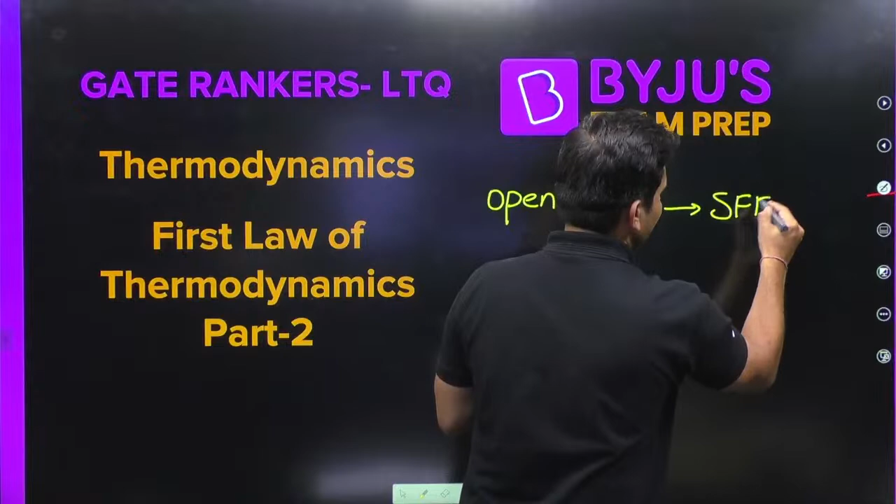Yesterday we were discussing first law of thermodynamics, but our focus was on closed systems. We have done one question for open system. Today our focus is on open system, and in open system we talk about the steady flow energy equation and the unsteady flow energy equation. This is our focus for today. Okay, so let's start.

Let's very quickly move to the question that I gave you yesterday. Sachin, I think you were there, and if people here were there yesterday, could you please tell me, did you solve it? What was the answer? Did anyone try this question so that we can move ahead? Because today we have to solve many questions for open system. Did anyone try this? Very quickly, can you please tell me what is the answer for this?

Which statements are true? A is not correct. Yes, very nice, Bhavya. Is B, C and D correct or not? Okay, you did not solve it, or you were not able to solve it. Sachin, did you try it? Rest all are correct. B, C, D are correct. B, C, D, they are all correct.

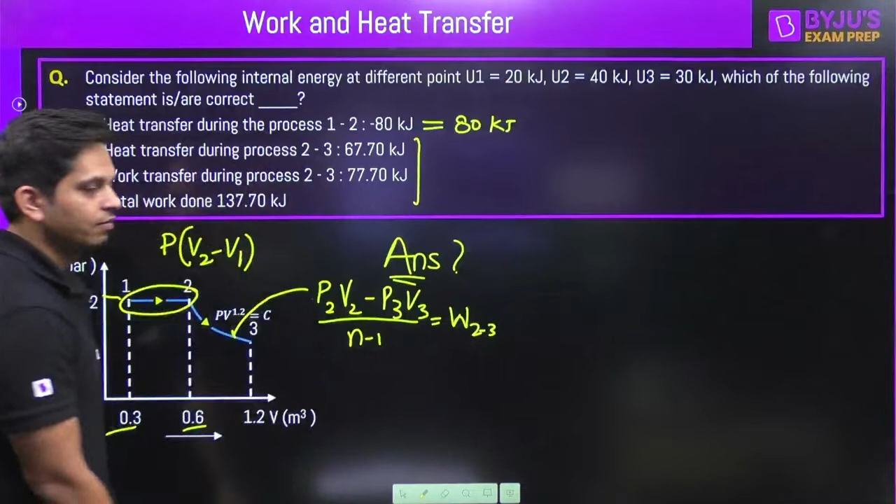Okay, Sachin, we will move ahead because I have to solve some open system questions which are fairly long, so we have to focus on that as well. But that is a very easy question. Okay, so we are moving ahead. Okay, this is the first question.

A gas flows steadily through a rotary compressor, so they are saying it is a steady flow. The gas enters the compressor at a temperature of 16 degrees Celsius. So what do we have? We have a compressor, entering here, and coming out here. So a gas is entering into the compressor at temperature 16 degrees Celsius.

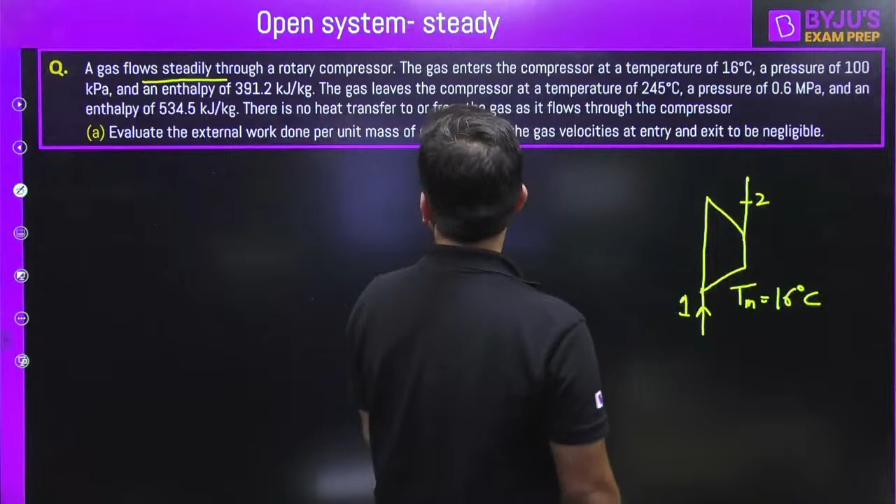Temperature T in is equals to 16 degrees Celsius and pressure is 100 kilopascal. Okay, and enthalpy is also given at the inlet, enthalpy is 391.2 kilojoule per kg.

Now the gas leaves the compressor at a temperature of, so it is leaving, T out is equals to 245 degrees Celsius. Pressure is 0.6 megapascal, okay, it is megapascal not kilopascal, you have to change it into kilopascal. And enthalpy is also given, enthalpy is 534.5 kilojoule per kg.

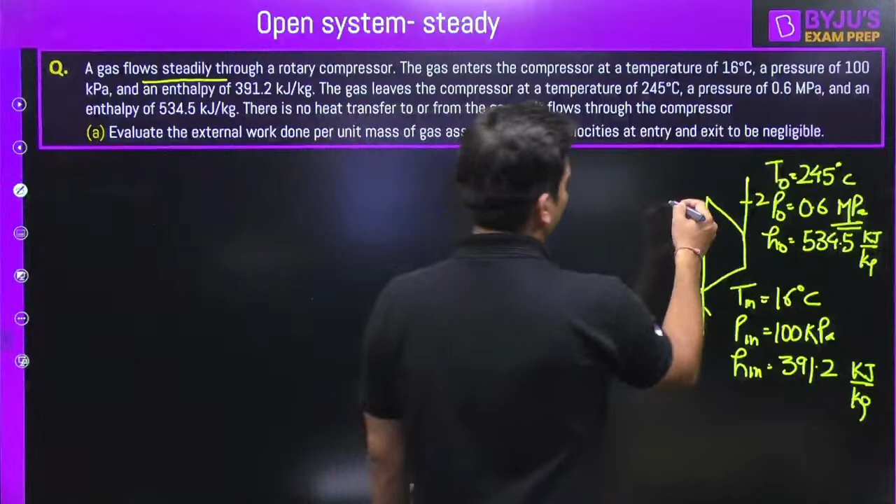Kilojoule per kg. There is no heat transfer, neither it is coming in nor going out. So heat transfer Q net is equals to 0. Now evaluate the external work done per unit mass, so mass is 1 kg, assuming the gas velocities at entry and exit to be negligible. That is part A.

Okay, so what do we know about this? It is a steady flow system. What do we know about steady flow systems?

If I apply energy conservation, the first law of thermodynamics, in this system, can I write: energy in equals energy out plus energy of the system, if there is any change in the system.

Now it is a steady flow system. What does it mean by steady flow? Whatever mass is coming in, the same mass is going out. No mass or energy accumulation inside the system. There is neither the mass increasing nor decreasing, nor the energy of the system increasing. So there is no mass accumulation inside the system.

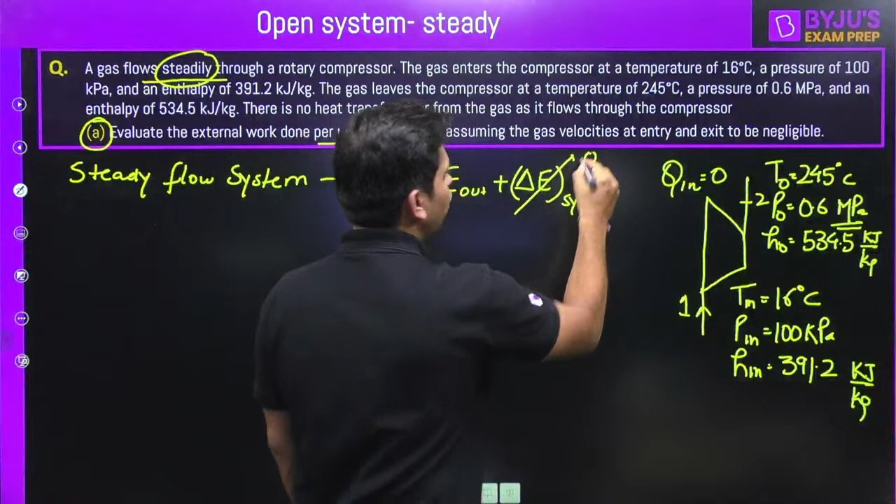Inside the system there is no mass accumulation and no energy accumulation, so this becomes 0 only for steady state. In unsteady state this is not equal to 0, we will see what it means. In unsteady state the energy of the system changes - this is your system. So for steady state, steady flow, it is 0; for unsteady, it is not 0. So what is energy in, what is energy out? We all know what is the steady flow energy equation.

M in, H in, plus V in square by 2, plus GZ in - what is this? This is the energy that this mass has. Whatever mass is entering into the system, this much energy it has. This is the energy going inside with this mass, whatever mass is going in. It is because of its temperature, its velocity, its potential difference.

Also, if any heat we are giving to the system, we are assuming that we are giving the heat to the system as of now.

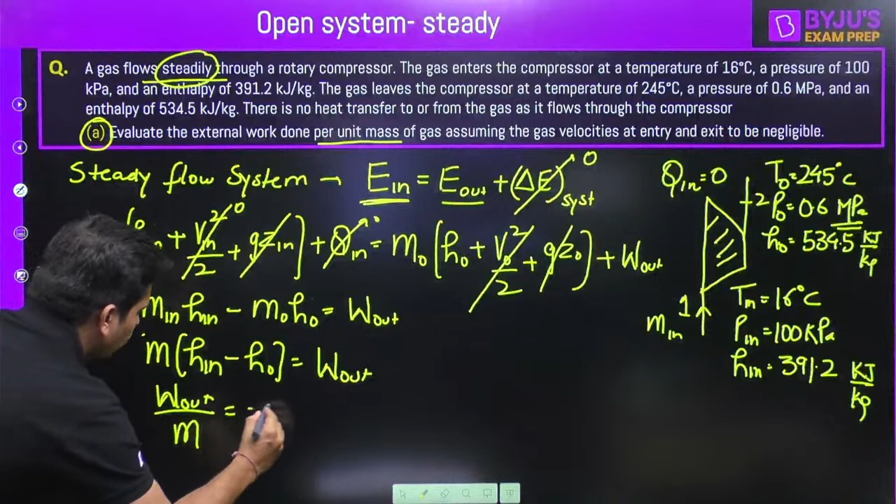Now it is a steady flow system, so what do I know? I know that mass in is equal to mass out, since it's a steady flow system. I can take mass common: H in minus H out is equal to work output, and now I can say work output by mass is equal to H in minus H out.

Now what is this? This is work per unit mass, external work done per unit mass, so I can show this by small w. Work output is equal to H in minus H out. H in and H out is given to me - this is H in, this is H out. When you put this, you will get minus 143.3. Kilojoule per kg.

Why is it negative, Sachin? Yes, very nice. Always put the units, please.

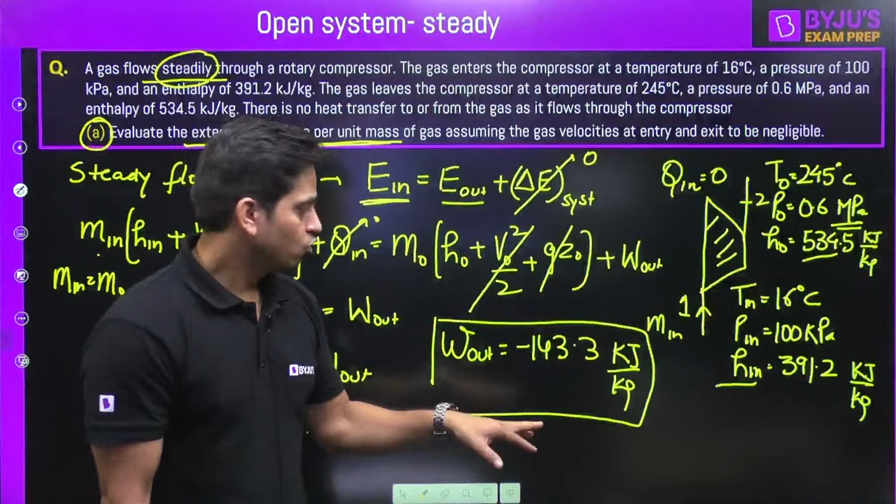So why is it negative? Because in the beginning I assumed that my system is giving me work. I have taken the notations like this, so this is not work output. Work output is negative, it means it is work input. This is when I am assuming gas velocities at entry and exit are negligible.

Very quickly tell me, if I also assume entry and exit velocities, what will be the answer? We have to do some work on the device. Yes, that is why it is negative, because we assumed that my system is giving me work. If it was positive, that means it is giving me work, but it came negative, which means I am giving that work to the system.

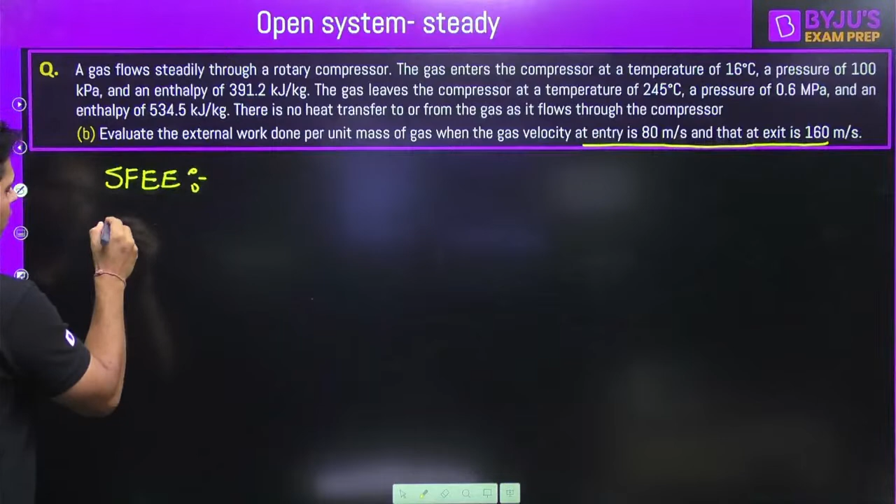Now very quickly write the steady flow energy equation. H in plus V in square by 2 plus GZ in plus Q in by mass is equals to H out plus V out square by 2 plus GZ out plus W out by mass. I have divided everything by mass.

161, I don't think it is correct. Can you please check it one more time, Bhavya? I don't think 161 is correct, just check one more time. So this is 0, we know, this we are assuming negligible.

So work output, let me write it by small w, is equals to Hi minus H naught plus Vi square minus V naught square by 2.

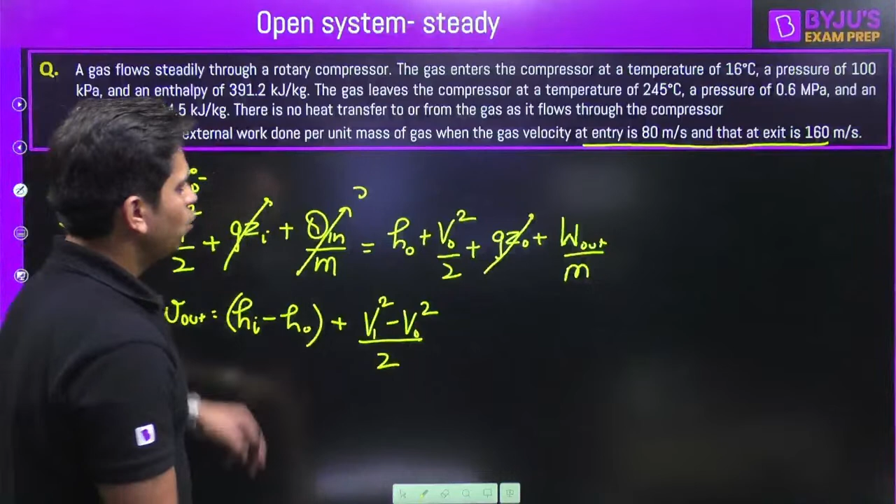Now there is something that you need to consider here. This equation is derived in a way that it is in joules. H is in joules, H is in joules per kg. Velocity is in meter per second.

And GZ is what? Meter per second square and meter, so this is meter square second square. So basically it is in terms of joule, not in kilojoule.

Whenever you are putting, now you have to be very cautious when using this equation. When you are putting H in kilojoule, which is given to us, you have to multiply this by 1000. This 2, you have to multiply it by 1000. Also, this you have to divide by 1000.

Then these, because what do we know? That meter square second square is equals to joule per kg. Okay, joule per kg, you can try to derive it. You can try to derive this, it can be proved.

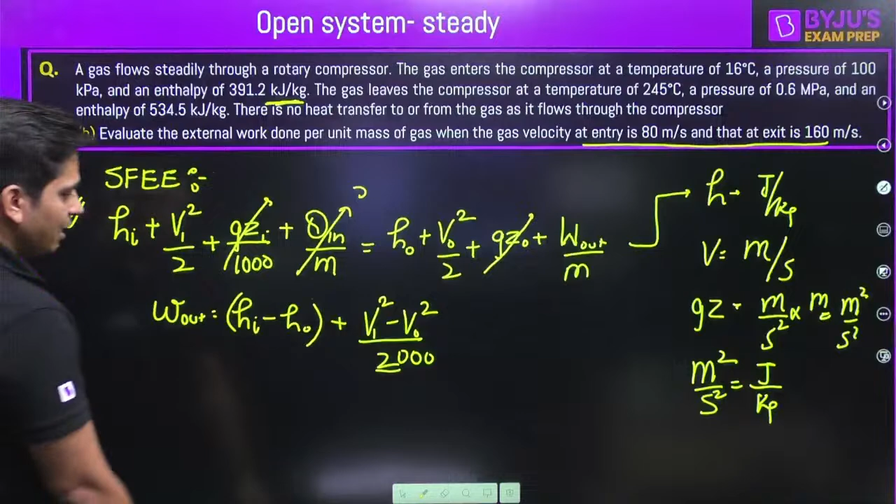So now I think you should get the answer. How much is it? V1 is 80, V2 is 160. 152.9, absolutely correct. Sachin and Pawan, are you able to solve this? Did you solve it? I think you made some mistake earlier, but are you able to solve it now? Pawan, yes, minus 152.9 kilojoule per kg, absolutely correct.

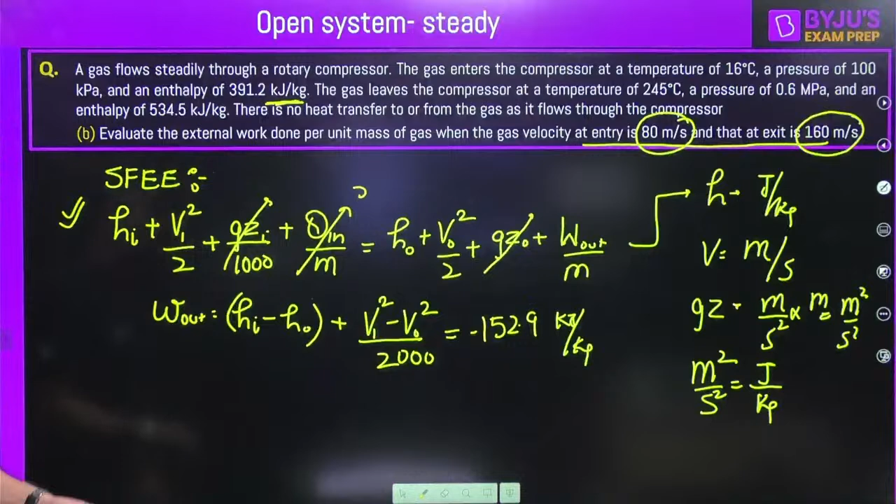Kilojoule per kg, okay, so we can move ahead with the next question. This is a good question. I have shortened, I have reduced the question for you. It has 4 parts, but we are considering only 2 because that is relevant for our open system. Now what is it saying?

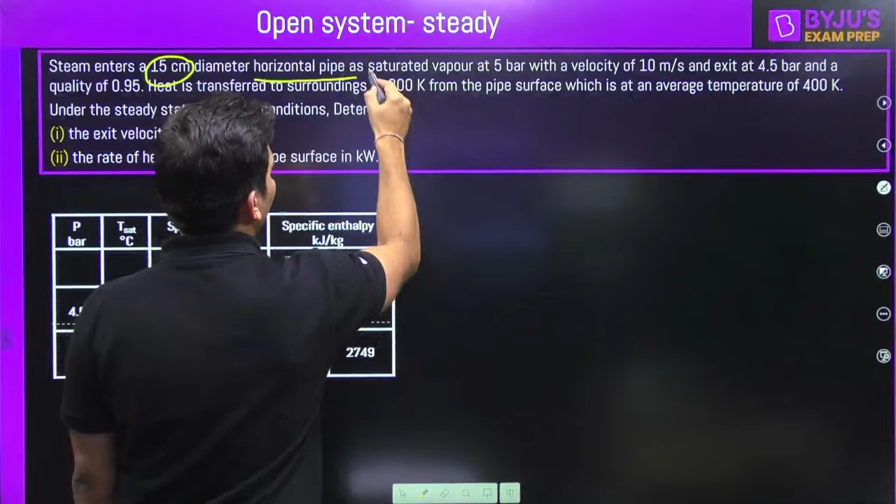It is saying steam is entering into a 15 centimeter diameter horizontal pipe. Please consider each and every point, each and every point is important. This is the diameter of the pipe. We have a horizontal pipe and saturated vapor. Saturated vapor means, what is the dryness fraction? X is equals to 1.

It is entering at 5 bar with a velocity of 10 meter per second, and it is exiting at 4.5 bar. So pressure is reduced, and the exit quality is 0.95. So what does it mean that if I say the quality is 0.95?

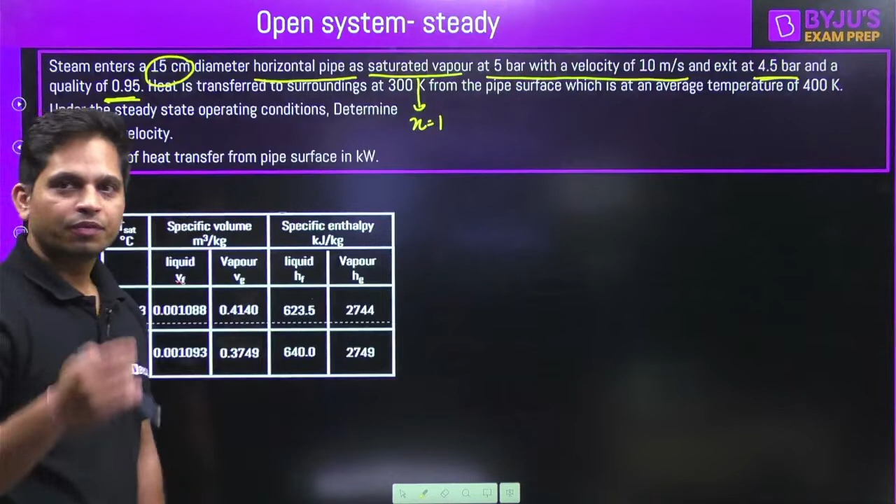If I am saying quality is 0.95, what does it mean? It means that it is a mixture of vapor and liquid, and 95% is vapor. Now heat is transferred to the surrounding at 300 Kelvin from the pipe surface, which is at the average temperature of 400 Kelvin.

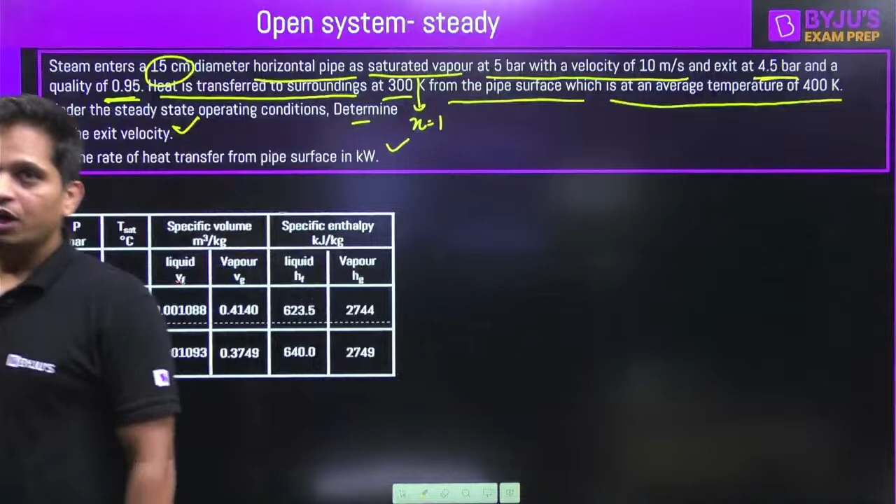So the pipe surface is at 400 Kelvin, surrounding is at 300 Kelvin. Under the steady state operating conditions, we have to determine exit velocity and the rate of heat transfer from the pipe surface. Now, because it is a mixture of vapor and liquid, this steam table is given. We are going to use that to find the exit velocity and rate of heat transfer.

Okay, so this is the question. Let us draw the diagram of it. We have a horizontal pipe.

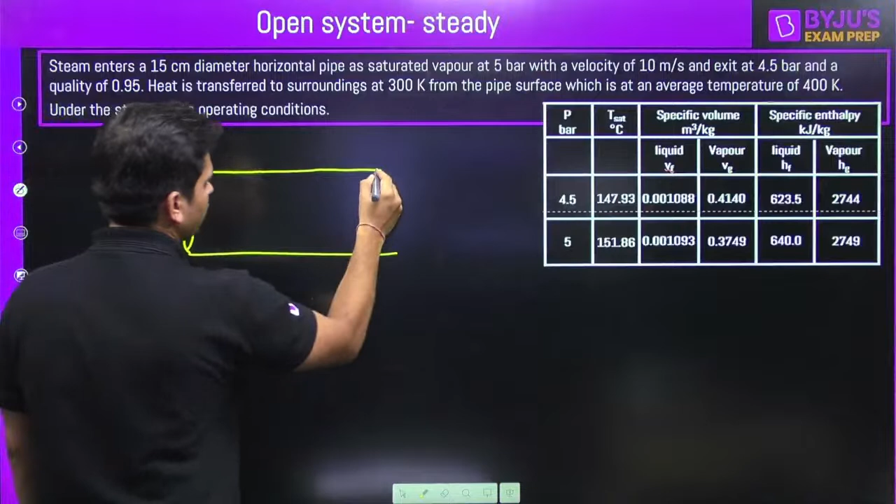We have a horizontal pipe of diameter 0.15 meter. Can you tell me what is the area? Pi by 4, 0.15 square. Please calculate the area. Okay, this is the area of this pipe.

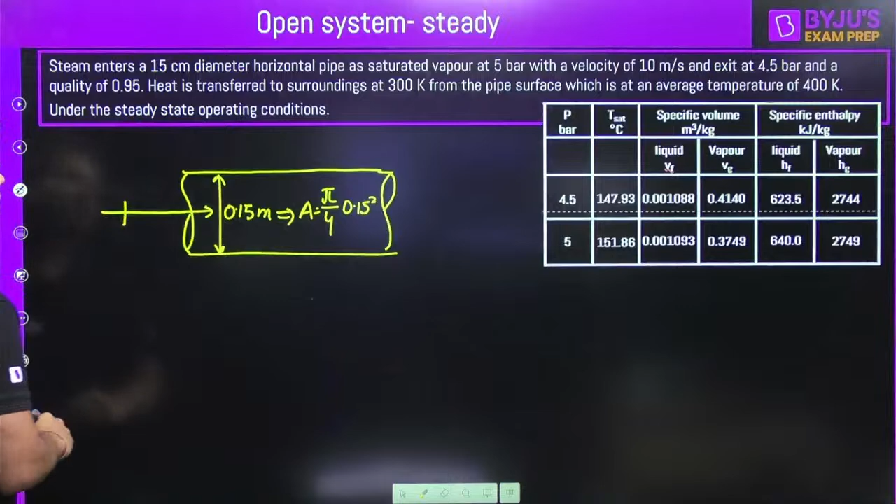Now steam is entering at 5 bar. So P1 is 5 bar and velocity 1 is how much? 10 meter per second.

Okay, let me check. No, that is not correct. What is that? Meter square. What is meter square? What? Okay, I'm sorry. Area is okay. That is correct, I think. Let me check the answers. 0.0177. Yes, correct.

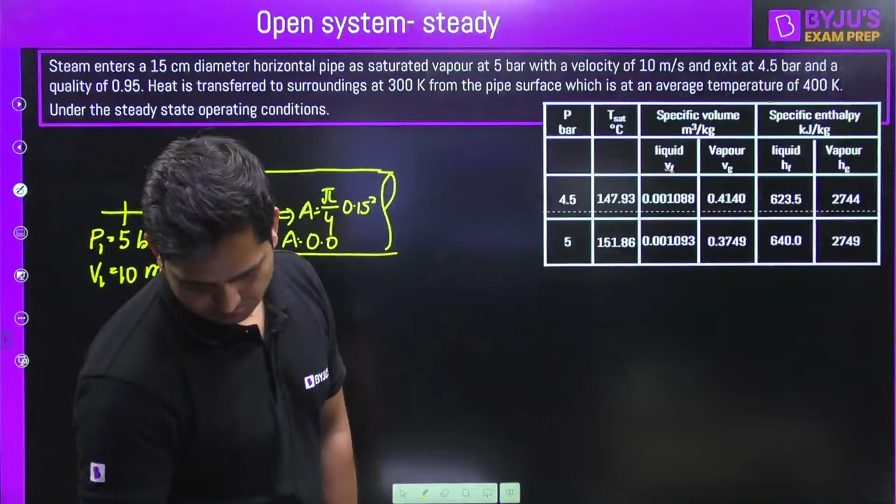Area is equals to 0.01... 0.0177 meter square. Okay. Now the steam is coming out.

Here the dryness fraction is equals to 1. It is pure steam. Here the dryness fraction is 0.95, that means it is a mixture of steam and liquid. And pressure given at this point is 4.5 bar.

Now I need to find out V2 and... I'm sorry, I need to find out heat transfer. So they are saying some heat transfer is also happening. Q out is there, Q out is there. So two things I need to find out.

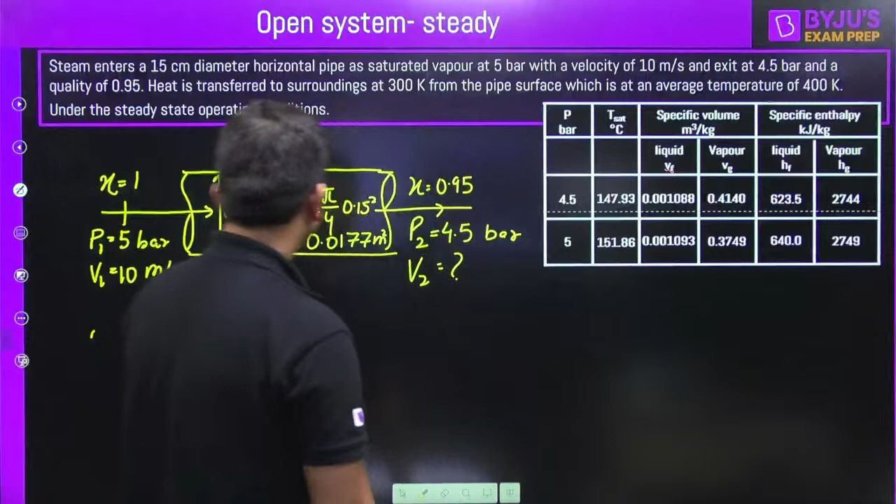Okay, so what do I know about steady flow? I can use the steady flow equation, right? So let me write the steady flow equation, the steady flow energy equation.

What is it? M in, H1 plus V1 square by 2 — always if you are putting H in kilojoule, you put here 2000. But I always define it according to joules, so this is a general equation, plus GZ1

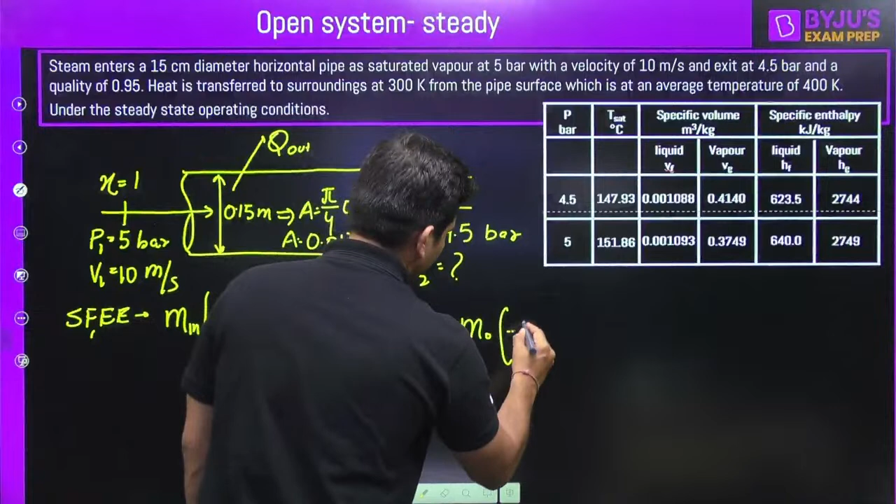plus Q in is equals to M out, H2 plus V2 square by 2 plus GZ2 plus work output. We all know this equation, there should be no doubt about it.

So we know it is a horizontal pipe, so I can neglect this. Also, steam is just flowing, there is no work output. It is not a work producing or work absorbing device, it is just a pipe.

They are saying some heat transfer is happening, which we need to find out. So I need to find out this, I need to find out V2 as well. So two unknowns are there in this equation.

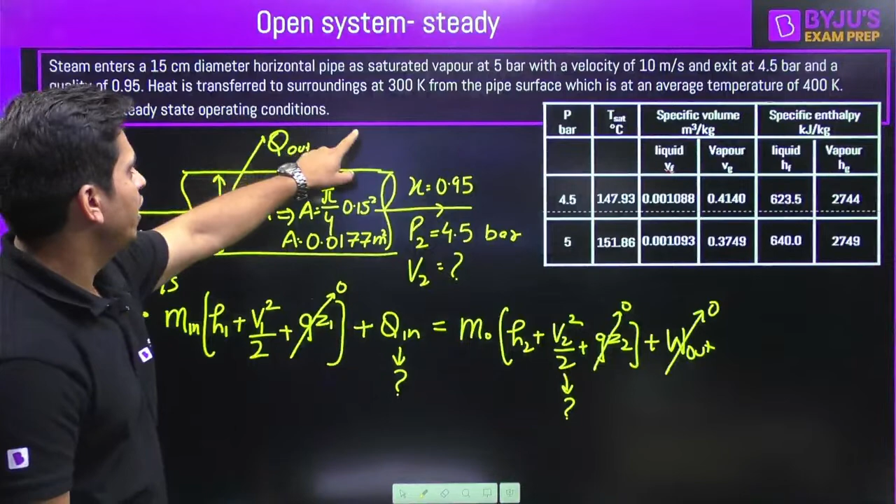Q, when you look, that is what? It is saying heat is transferred to surrounding at 300 Kelvin. So I know that there is some Q out. Now if it is Q out, I'll get negative, it's not an issue.

How to follow your lectures in order? I was not getting your previous classes.

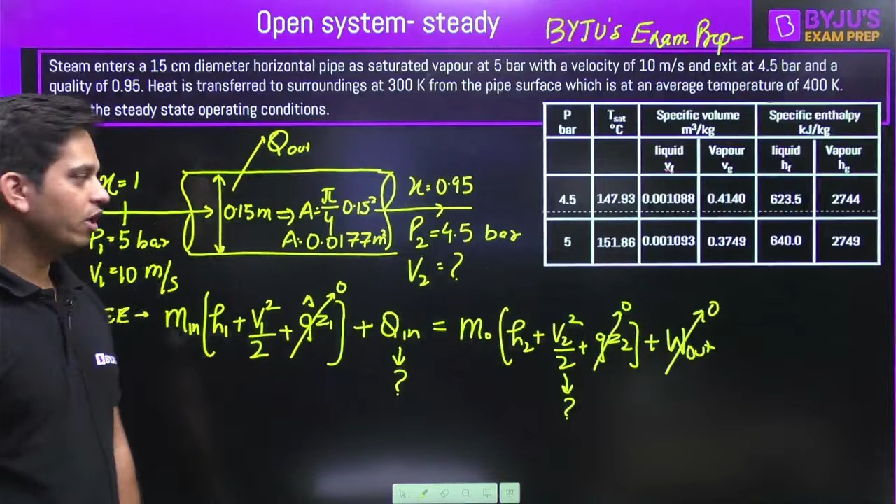So about work output, you should know that if it is a turbine, if it is a compressor, then you cannot neglect that. If it is a heat exchanger, a nozzle, a diffuser, a pipe, where only flow is happening, then you can neglect work output.

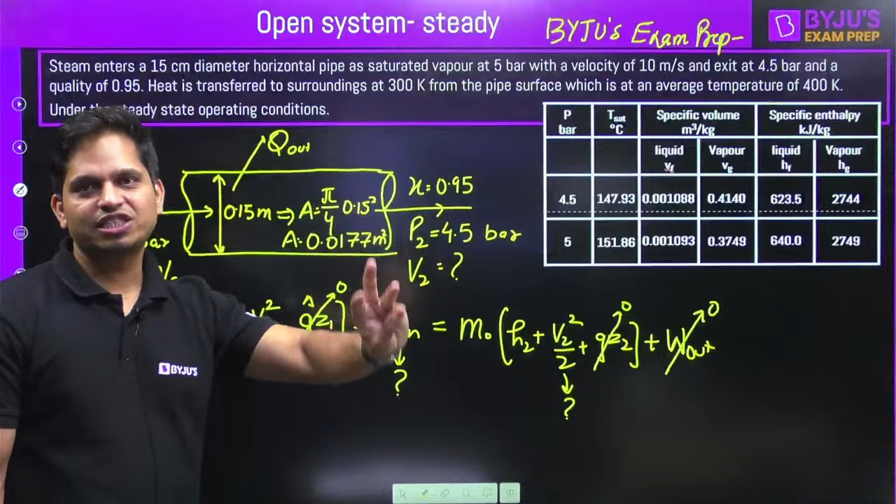Okay, those are not work producing devices. Only turbines and compressors or pumps handle liquid, so that doesn't come into thermodynamics much. Thermodynamics, 99% we deal with gases. We don't talk about pumps in thermodynamics much, but sometimes a question comes. In compressors and turbines, work cannot be neglected. In nozzles, diffusers, heat exchangers, pipes, work is neglected. Very quickly let's move on, we have less time and have to solve a lot of questions.

Now is there any other unknown in this, or can we find things out? How can you find out M in? M dot in is equals to rho 1 A1 V1, velocity, density, area into velocity.

Okay, so can I write A1 V1 upon specific volume 1? What is specific volume 1? Specific volume here, where we have 5 bar and saturated steam. So, area into velocity upon specific volume. Can you tell me what is the value of specific volume 1, V1?

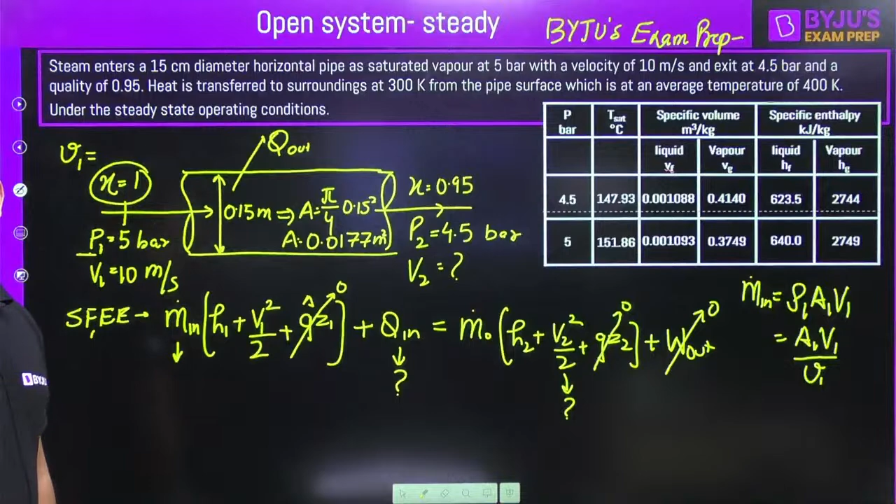Can you see this table and very quickly tell me what is this? I hope this table is clear, it's not blur. 0 point, yes, very nice. This is V1, very nice.

So you can find out M dot in, and it is a steady flow system. So M dot in is equals to M dot out as well. It is a steady flow system. Now what is happening? It is a steady flow system. Now, so I know this, I know this, I know this.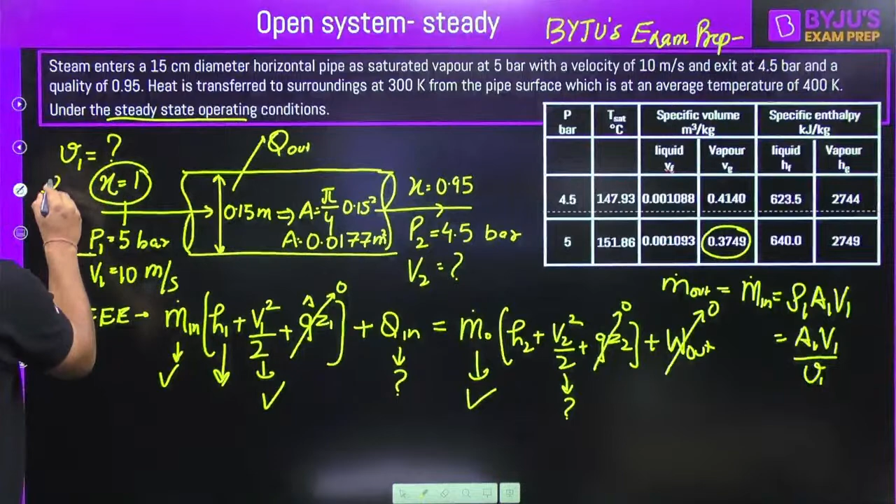V1 is known to me. H1, what is H1? Can you tell me what is H1? Can I calculate what is H1? H1 is here.

M1 is equals to, I think, 0.471. Yes, that is correct. Bhavya, M1 is 0.471, or 2, I think I got 2, but anyway, kg per second. Okay, H1, can you tell me H1? H1 is 2749, very nice. So this is also known.

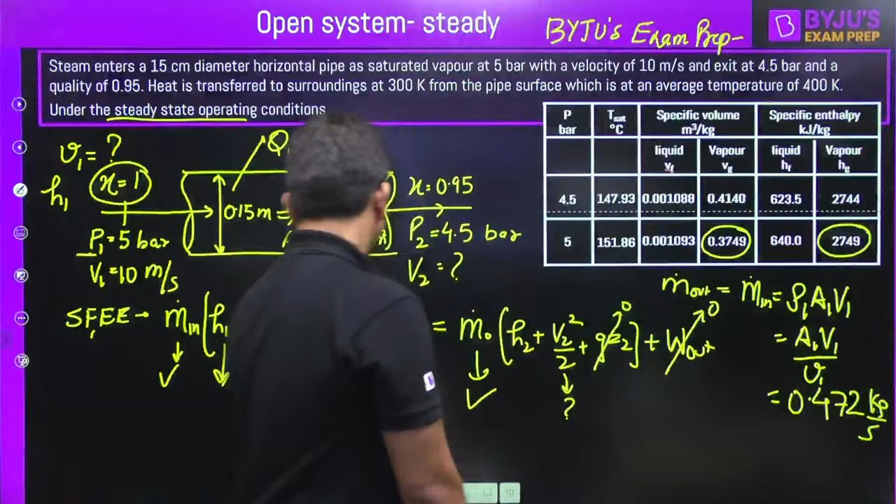How can you find out H2? Can I calculate H2? Sachin, yes, 0.472. I think I am getting the same. Okay, can you tell me what is H2? Very quickly.

H2, can you calculate? Here is it H2. H2 is this side, and I hope you all know it is HF plus X HFG. Very nice, Bhavya. So can you tell me H2 as well? Then the question is solved. Nothing is there, just the value of H2.

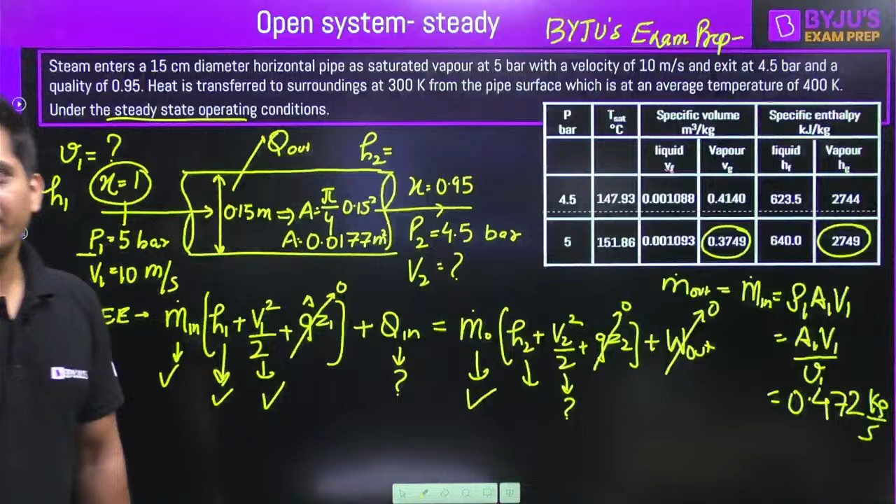Sachin, is it clear how I... so here you write HF plus X into Hg minus HF. But it is at what? Exit, so 4.5 bar. So you will see this, and this is your Hg, this is your HF, and X is equals to 0.95.

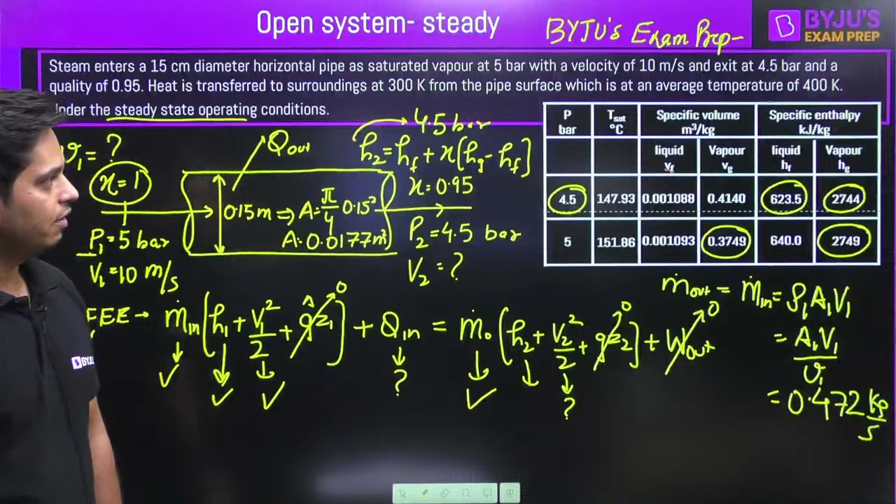So can you tell me how much is H2? H2 is... no, it is not correct. Are you not able to see the values, Bhavya? Is it blur or something? Pawan, did you ask something? Is there an issue? I can explain. 2637, yes, that is correct. H2 is 2637 kilojoule per kg.

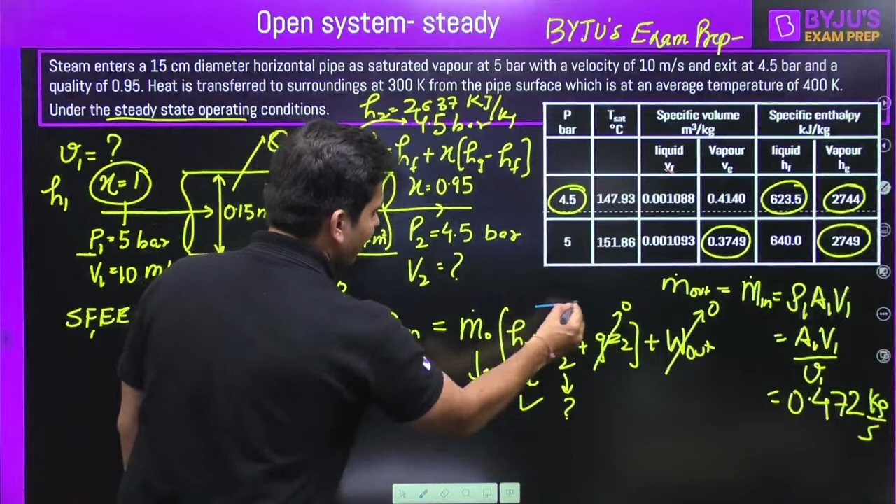Now, can someone very quickly... okay, so the conclusion of this is that I know H2 as well, but still I have this unknown, and I have this unknown, two unknowns. So I cannot use this equation. Everything else is known to me, but I have two unknowns, so I cannot use this equation. So what will I do?

I need to calculate exit velocity, and it is a steady flow system. In a steady flow system, SFEE is valid, and also continuity equation is valid. Continuity equation is valid. What is continuity equation? Mass conservation equation.

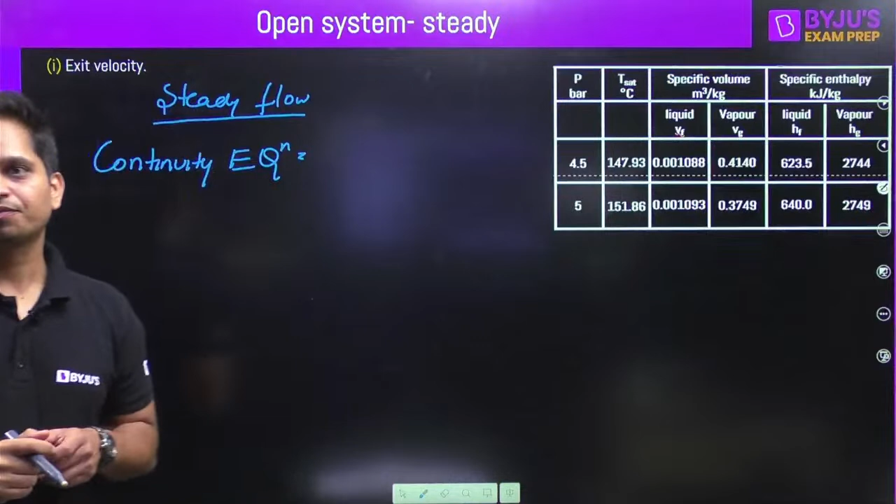Okay, so m dot in is equals to m dot out. A1 V1 upon specific volume 1 is equals to A2 V2 upon specific volume 2. Sachin, are you gone? Why are you not answering? Are you not calculating?

How much is the HF? Okay, HF is 623.5 kilojoule per kg, this is HF. Hg is 2744 kilojoule per kg. HF is 623.5. Yes, okay.

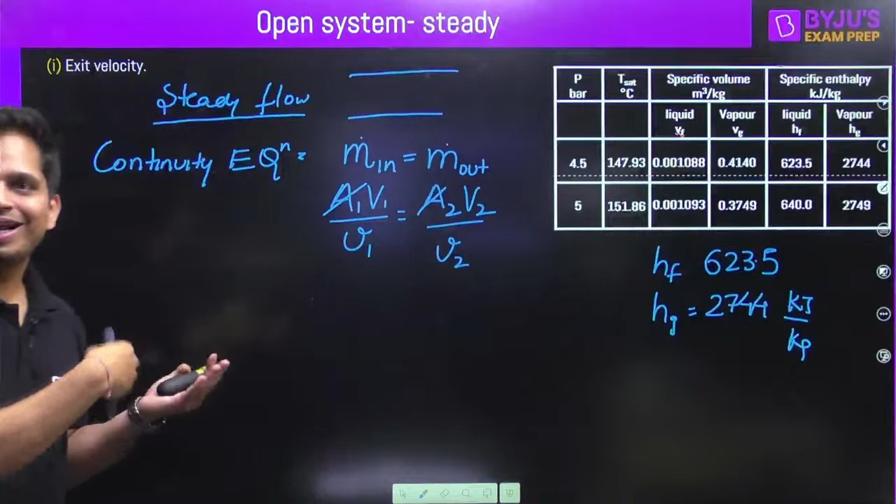Now, it is a horizontal pipe, so area 1 is equals to area 2 at both the sections, inlet and exit. Area is same. I have to calculate V2, velocity at 2. So V2 is equals to V1 into specific volume 2 upon specific volume 1. Can you calculate specific volume 2?

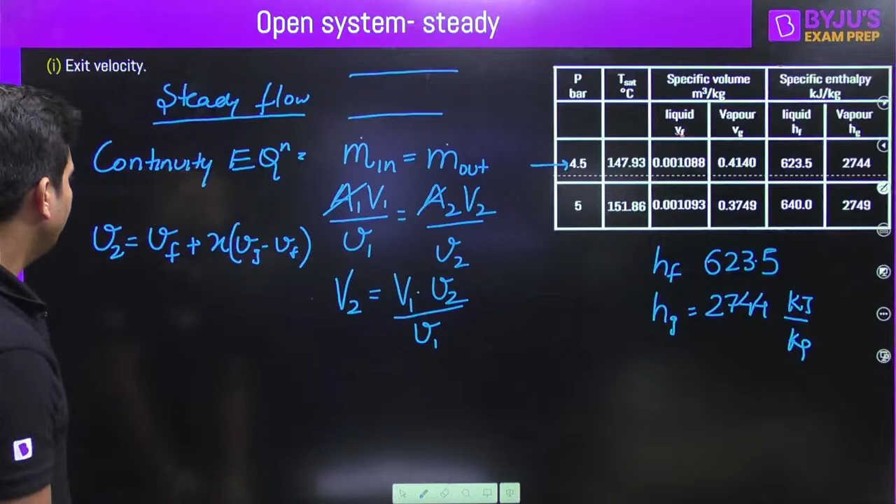Same as what we did with H2, right? Specific volume 2, how do you calculate it? Specific volume 2 at exit, pressure is 4.5. Can you give me the specific volume value? How much have you calculated? Vf plus X into Vg minus Vf. Okay, can you very quickly give me the specific volume at point 2? How much is it?

V2 is 10.49, that is correct. Can you give me H2? H2 equals 2744. No, it's not correct, I don't know what mistake you are doing. Bhavya wrote it there, it's 2637.9, that is correct, there is some mistake with your calculations. That is Hg, not H2. This is saturated steam, that is saturated liquid. So H2 will be HF plus X times Hg minus HF.

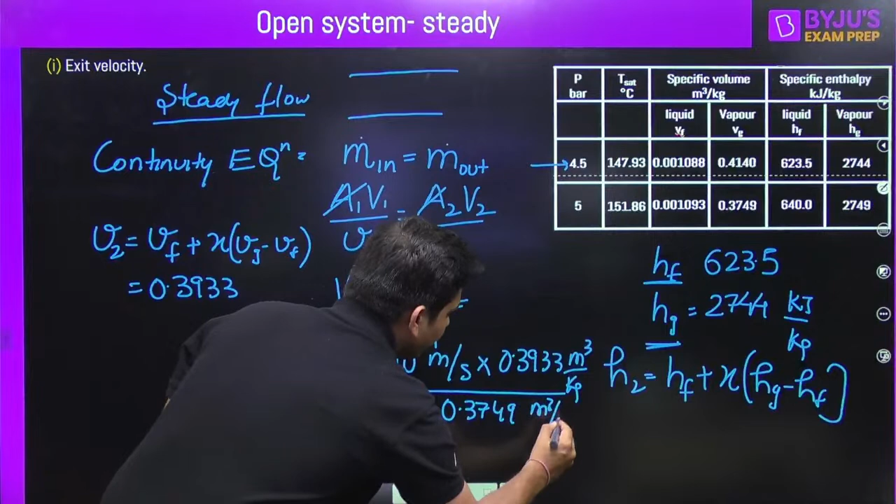Specific volume is 0.3933, that is correct, and I can put this here. V2 equals, V1 was 10 meter per second. Specific volume 2 is 0.3933 meter cube per kg, and specific volume 1 is 0.3749 meter cube per kg. This will get cancelled, you will get 10.49.

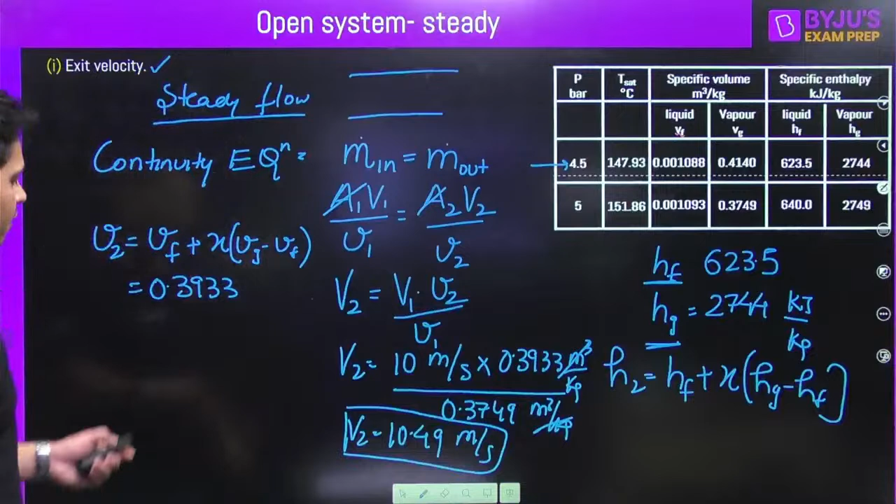Sachin, are you able to figure out what is the problem with H2? Is it clear? H2 you can calculate by that. V2 equals 10.49, right? 49, isn't it? Yeah, meter per second. So V2 we have calculated, velocity, exit velocity we have calculated. Okay, and finally we have to calculate rate of heat transfer from pipe in kilowatt.

Okay, Sachin, so I have to calculate. So now what do I have? Now I know V2, now this is also known. So in this equation only one unknown. I can use this equation and calculate Q in. So can you tell me what is Q in, or do I need to solve it for you?

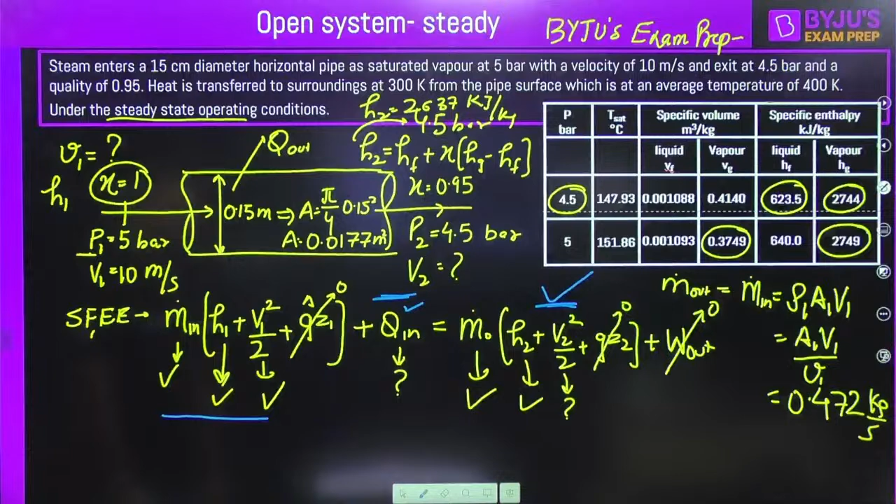M dot in, H in plus V in square. Now because H you are putting in kilojoule per kg, right? So you have to write 2000, plus Q dot in equals M dot out, H out plus V out square by 2000. Everything I know, I need to find out Q in. Q in minus

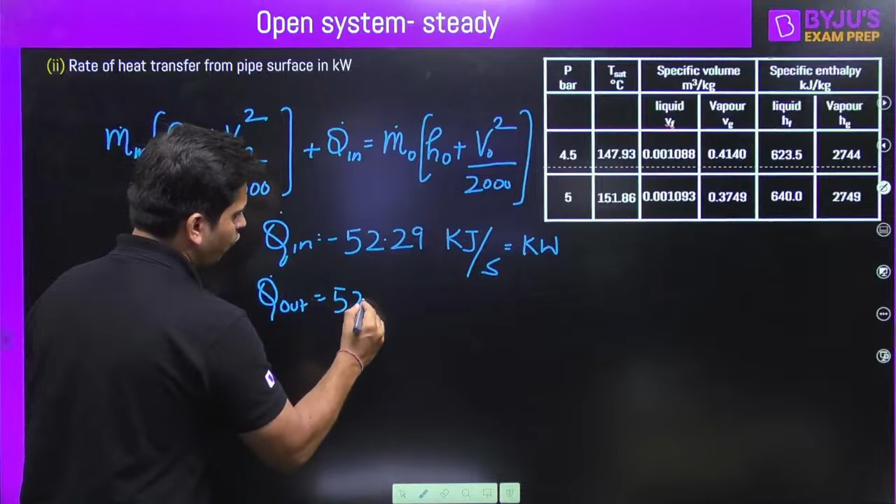52.29, yes that is correct. Minus 52.29, okay, kilojoule per second, because it is dot, okay so it is kilowatt. Okay, so this is negative. What does it mean? This is not Q in, but this is Q out equals 52.29 kilowatt.

Okay, I hope this is clear, because very quickly we have to move to unsteady flow systems. Okay, could you please tell me if it is clear? Sachin, is it clear?

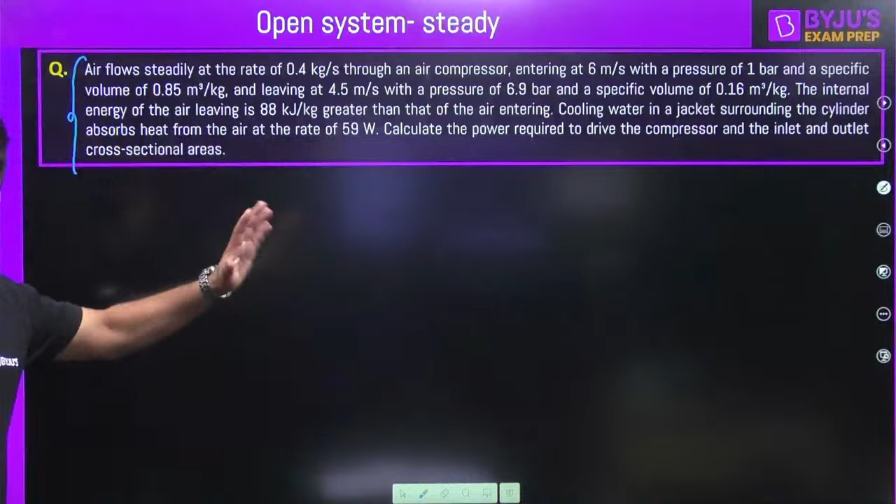Bhavya? Okay, so very quickly let's move on to, okay this is a question for steady flow. I leave it for you, you try this. If I get time today, I don't think I will get time today. If I get, we will discuss this, but you maybe take a screenshot or something. Okay, try to solve this, steady state, steady flow system. Then we will move ahead with unsteady state. We have 20-25 more minutes. Okay, let's move on.

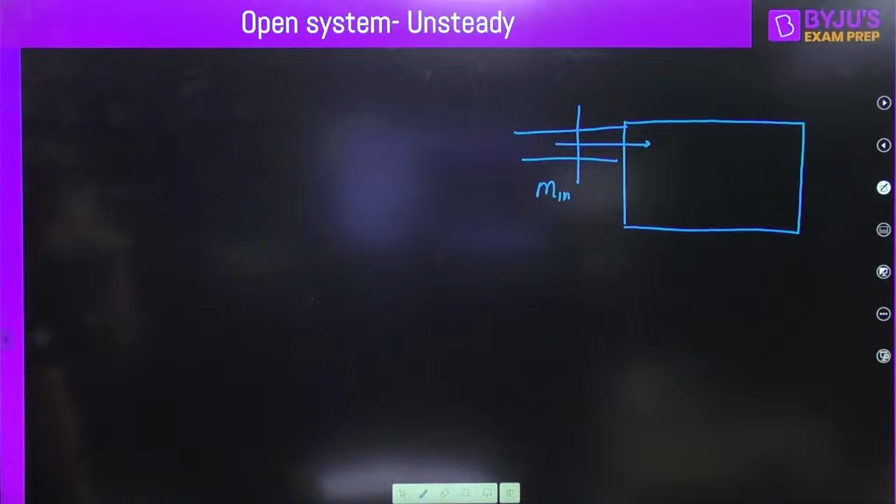Unsteady state system, so I hope you are aware with unsteady flow systems. What do we have? Let's say we have a system here. We have a system here. Now some mass is coming in, mass is coming in, so when this mass is coming in, it is bringing some energy with it. Okay. Yes, you can try, Bhavya and Sachin and everyone, please try this.

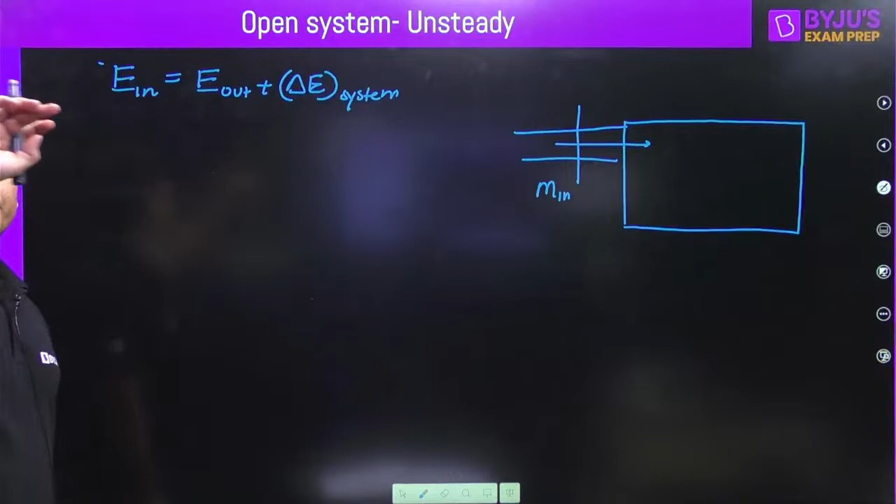Okay, so when this mass is coming in, it is bringing some energy. Anyway, first of all let's apply energy conservation equation, which is energy in equals energy out plus change in energy of the system. Change in energy of system. Now this change in energy for system was 0 for steady flow, but for unsteady flow it is not 0. Also what is not 0? M in is not equal to M out. M in equals M out plus change in mass of system, change in mass of system.

So in unsteady state, what happens? Either the level of the amount of mass in the system will increase or decrease depending upon how much mass is coming in and how much mass is going out. Okay, M out. So when this mass is coming in, it is bringing some energy with it. What is that energy? That is M in, H in plus V in squared plus GZ. Okay, also I am assuming I am giving some heat to it, Q in. I am assuming, I don't know, it can be rejected to the surrounding, but I am assuming I am giving, so I will take it inside. Okay, Q dot, Q in.

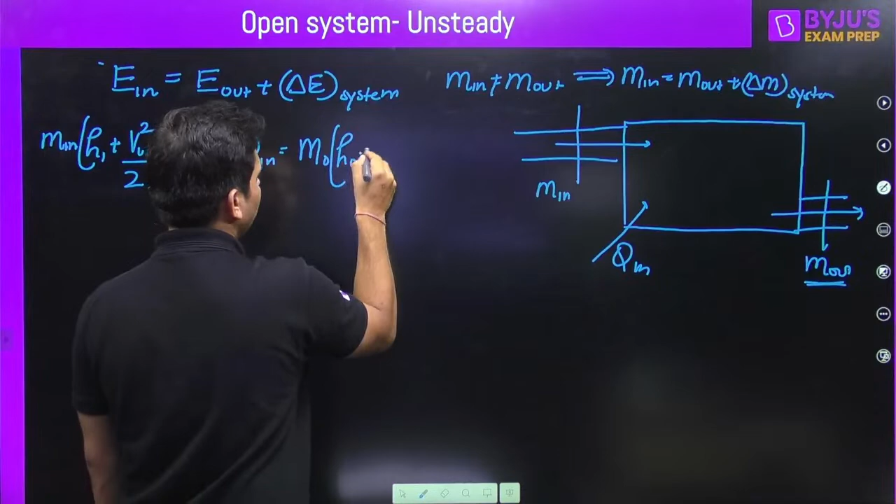Okay, now what is going out? So when this mass is going out, it is taking some energy with it. What energy it is taking out? M out times H out plus V naught out plus GZ out. This energy it is taking. Also I am assuming my system is there and it is giving you some work output.

So I have to write it on the outside, work output. Now, very important here is that M in is not equal to M out. So what will happen? For example, if mass is M1, it will not remain constant, because if more mass is coming in, the level will change to M2, which is greater than M1. Or if more mass is going out, then M2 will be less than M1. So if I say the initial condition of this system is 1 and the final condition is 2.

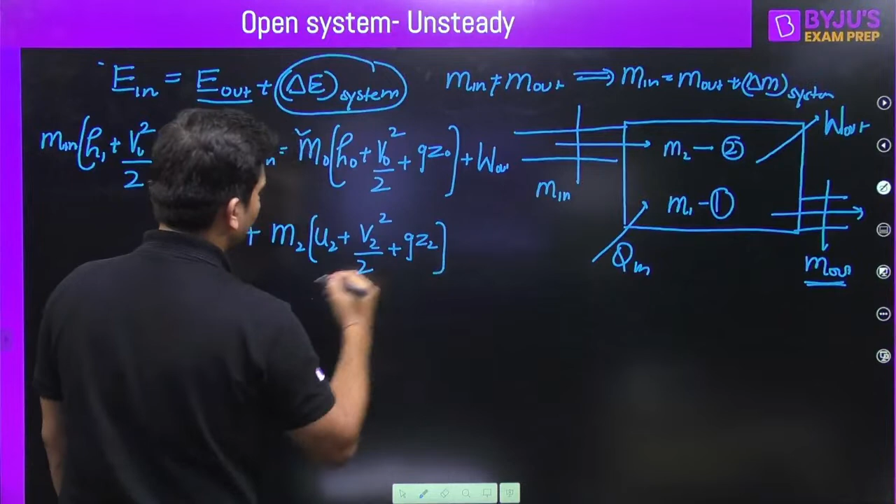So when the mass level is increasing or decreasing, the energy of the system is changing. So what is this energy change? This is plus M2 times U2 plus V2 square by 2 plus GZ2, minus M1 times U1 plus V1 square by 2 plus GZ1. This is the change in the energy of the system, inside the system. Okay, is it clear? Can you quickly tell me, is it clear?

This is because what is entering, this energy is what is entering, this is if we are giving some heat. This is because the mass is leaving, so energy is leaving, if work output, and that is the change in energy of the system. Okay, Sachin, if it is clear, then your unsteady state questions will look very big.

But if you understood this, you have to know what terms I can cancel. Now, most of the time you have to cancel kinetic and potential energy. If they are giving you information about velocity in the question, then you cannot cancel, otherwise you can cancel that.

Okay, also everything will get cancelled. Its applications for unsteady state are filling of tank, filling of bucket, or filling of tank, whatever it is. So what is happening? I am filling a tank. No mass is going out. If no mass is going out, then this can be 0. If the tank is initially empty when I started filling it up, then this will be 0. Okay, so based on what is given in the question, you can cancel a lot of things.

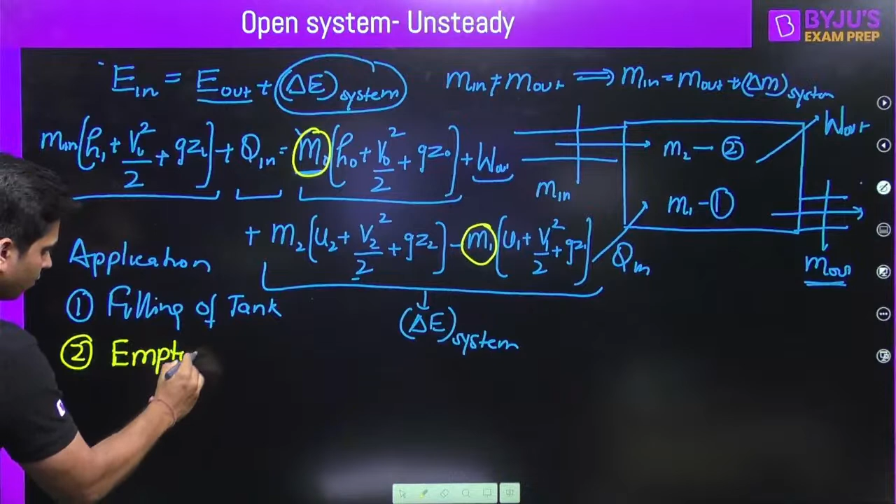Also second, emptying of tank. So your tank is already filled, it's full, right? So you know what M1 is. You are emptying it completely, so M2 will be 0. In the end, how much mass will be there in the system? 0, because you have emptied it completely. And your tank was full, nothing is coming in, so this will be 0. Only M out will be there. So based on what is given in the question, you can cancel a lot of terms in this equation. This equation looks really big, but ultimately you don't have to solve everything. This will get very simplified once you read the question and you are able to cancel the terms that are not required.

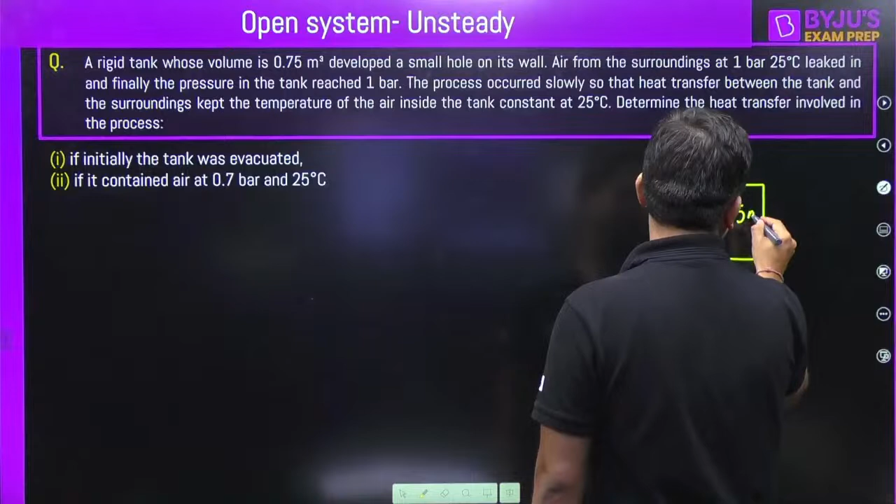Okay, very quickly let's move on to the question. A rigid tank whose volume is 0.75 meter cube. We have a rigid tank, volume is 0.75 meter cube, developed a small hole in its wall. Air from the surrounding at 1 bar is coming in, at pressure P in equals 1 bar and temperature T in equals 25 degrees Celsius, leaked in, and finally the pressure in the tank reached 1 bar.

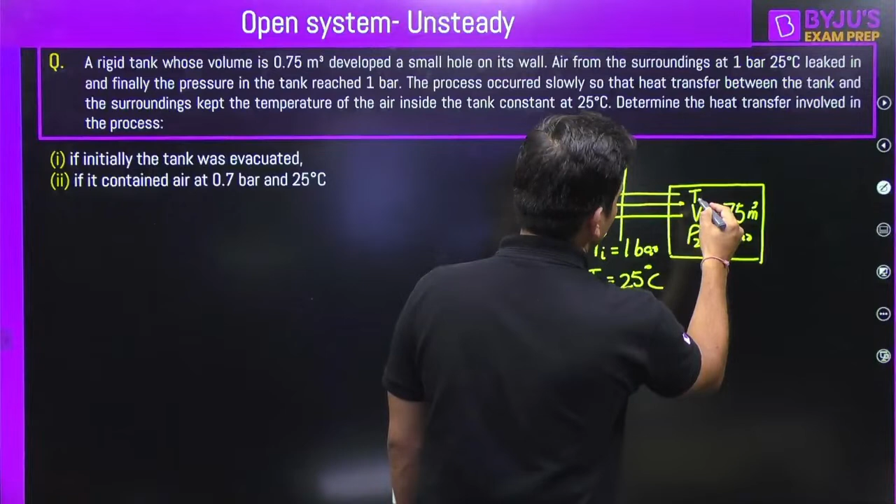So final pressure, what is final pressure? P2, final state is 2, initial state is 1, P2 is the final state. So P2 is equals to 1 bar. The process occurred slowly so that the heat transfer between the tank and the surrounding kept the temperature of the air inside the tank constant. Okay, so inside the tank temperature remains constant, T1 is equals to T2 is equals to 25 degrees Celsius. Determine the heat transfer involved in the process. How much heat transfer is happening?

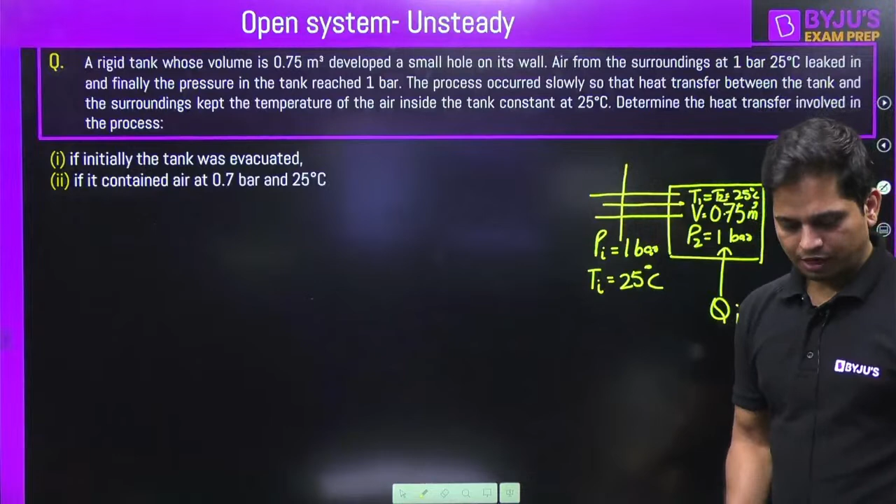Let's say I am giving it heat, whatever it is, it does not matter. Now the point is, we have the equation. First of all, nothing is given about kinetic energy and potential energy, so we can cancel that in this equation.

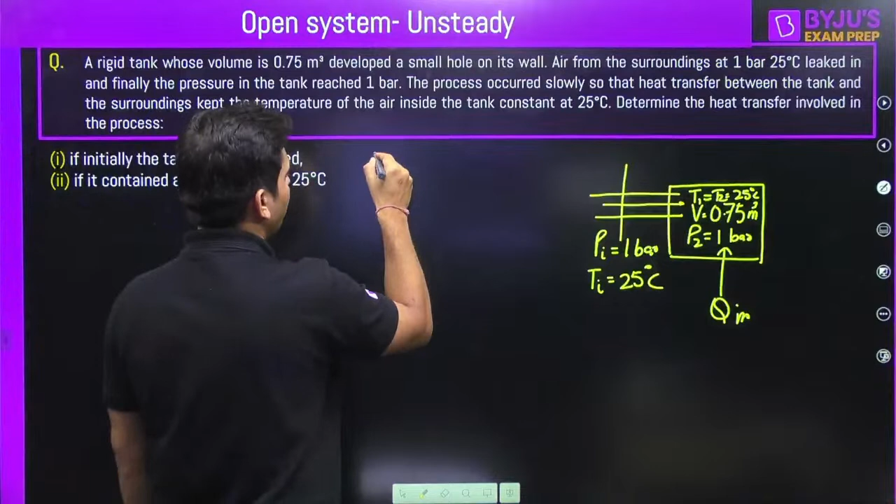Now you see, initially it was empty, so initial mass M1 is equal to 0. Now, is anything going out? M out, nothing is going out, so M out is equal to 0.

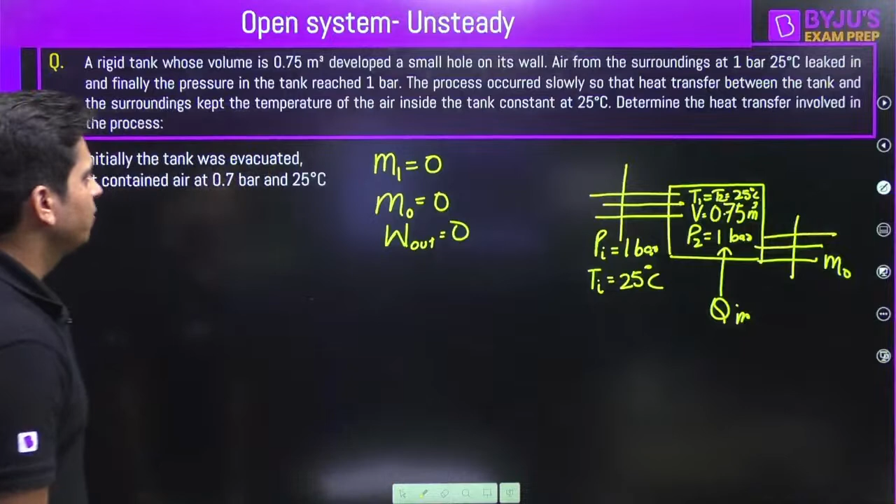Now it is a tank, only filling process is going on, so no work is involved. So what can I conclude from this equation? Everything is 0 because M out is 0, so this is 0, this is 0. Initial mass is 0, so this is also 0.

I am neglecting kinetic and potential energy, no information in the question. So this here is not 0, M2 is not 0, but I can neglect this. So ultimately what do I have? I have M in, what is coming in, and H in plus Q in, and everything else is 0, and M2 U2. What is left is M dot in.

Okay, we are doing part A. So they are saying initially the tank was evacuated, so M1 was 0 earlier, that is how it came. Initially the tank was empty.

So I am left with M in, H in plus Q in is equal to M2 U2. Is it clear? This portion, this portion, and this portion. Could you please tell me, is this clear? Is this how this equation came?

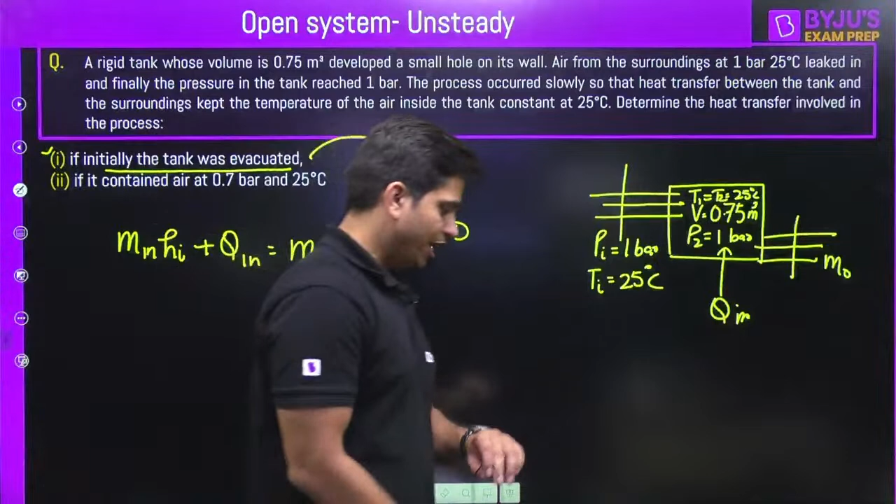Very quickly please tell me, our time is, we don't have much time. Yes, okay Pavan, if it is clear then very quickly tell me, what is Q in? Q in is equal to M2 U2 minus M in HI.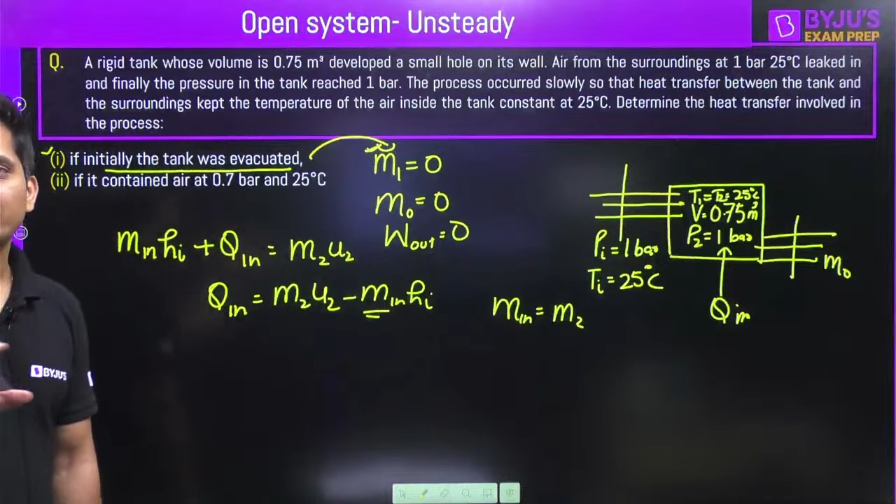Now you see, initially the tank was empty, now I am filling the tank, so whatever M in is there, whatever is filling, will be equal to the final mass, because the tank was already empty in the beginning. So I can write M...

U2 is CV T2 minus CP T in, and also tell me, they are saying that the temperature remains constant. So Ti is also 25 and T1 is equal to T2 is 25. So I can take T, CV minus CP, CV minus CP.

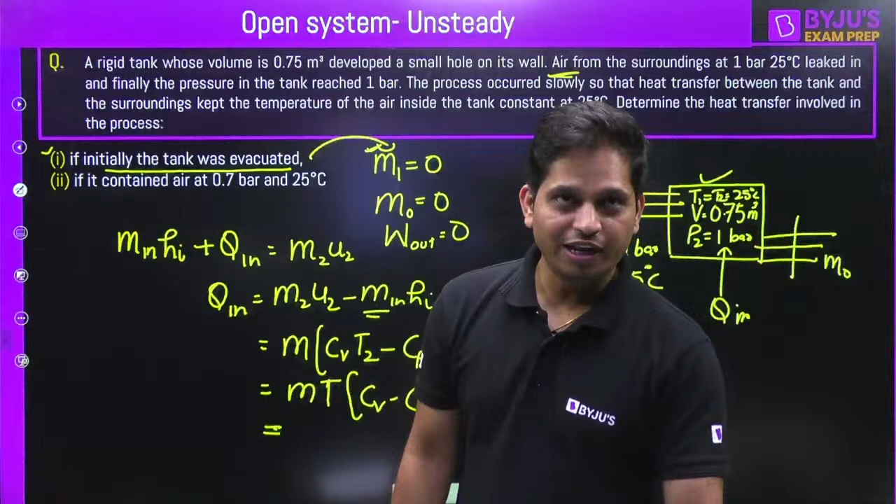Very quickly tell me, what is this? CP minus CV is equal to R, and this is air, from the surrounding. Last, I think yesterday there was a question with ideal gas, that in that question it was missing. You cannot use air values if ideal gas is given - maybe it was my mistake, I did not see that question properly. Air should be specifically given, only then you can use R and CP values. CP is equal to 1.005 for air, and R is 0.287 kilojoule per kg Kelvin.

Okay, so tell me, what is the answer? Did you solve it? What is Q in? R is, yes, 0.287, yes correct.

Are you able to calculate mass also? I need mass, right? Mass is equal to, how will you calculate mass? P2 V2 upon R T2. P2 is known, volume is fixed, T2 is also known, R is 0.287, okay so 75.

But is it positive or negative? Yes, because this is minus R, this is minus R, okay? How much is mass? How much mass is there? Mass is equal to, yes, that will be kilojoule. Yes, kilowatt was not correct. Okay, 0.877, yes.

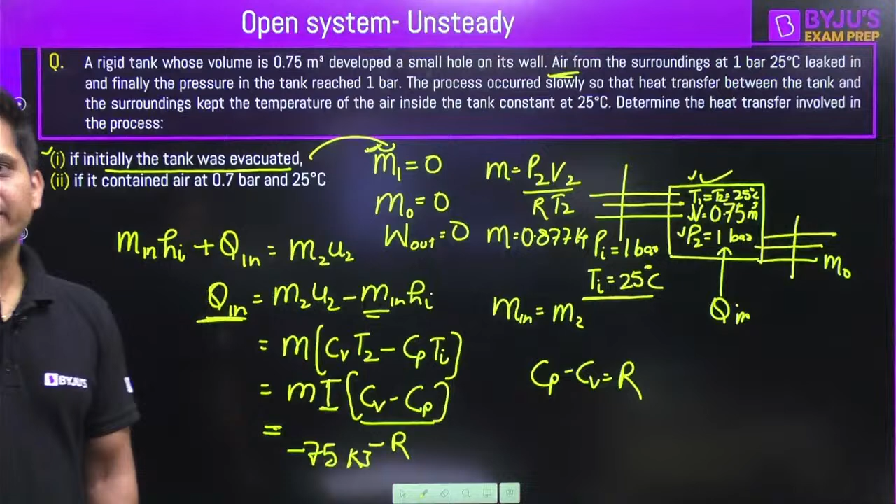0.877 kg. Okay, and when you use this, temperature is 298, 25 degrees Celsius, and minus R is minus 0.287, and the answer is minus 75 kilojoule. So minus means I am assuming it is in, but in the system it is going out. Okay Pawan, is it clear? Are you able to follow this?

Please quickly tell me, and I have to solve the second part of it. I don't think we will be able to move ahead. Okay, then we will move ahead. I hope you got this.

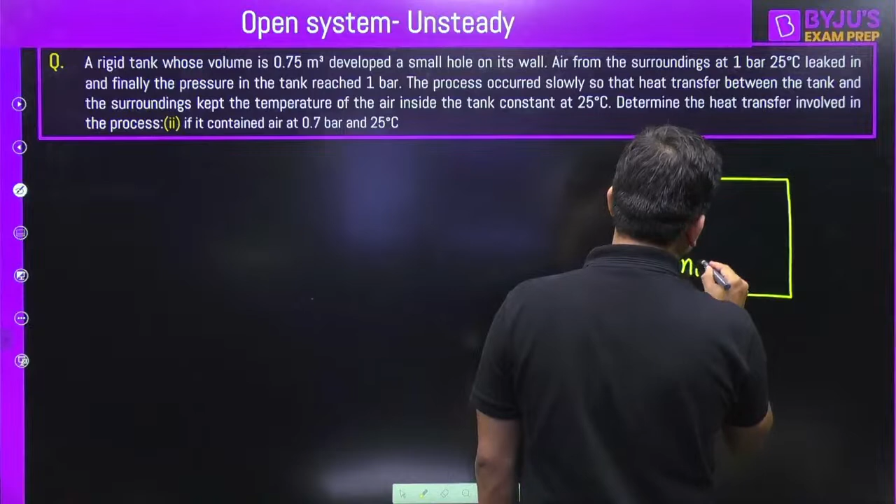Okay, Q in, now next part is, this we have solved already. Next part, if it contains air at 0.7 bar and 25 degrees Celsius. So this time your tank is not empty, your tank is not empty. It contains some mass M1 at pressure 0.7 bar and T1 25 degrees Celsius.

Then when the mass is flowing M in, it will change to M2. It will change to M2.

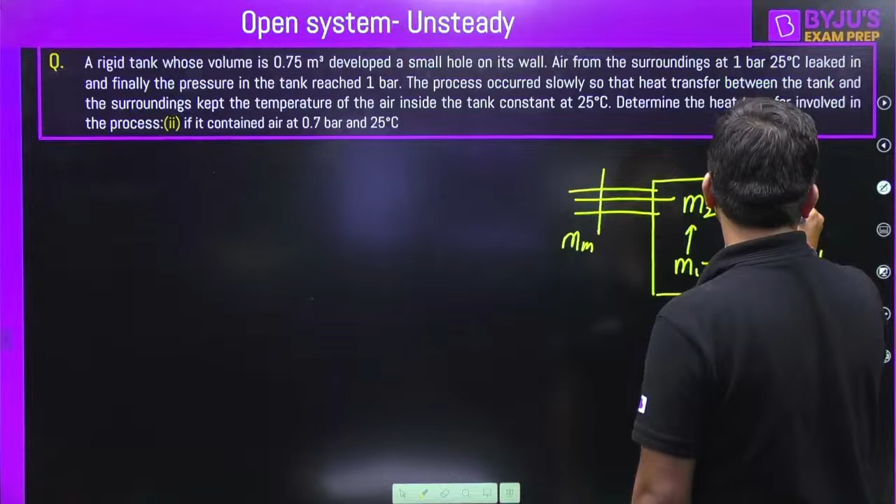So M2 we already know. We already know that the final pressure P2 is equals to 1 bar. Final pressure is 1 bar. And temperature T2 is 25 degrees Celsius.

So M2 will remain same. We already calculated M2 like this, right? M2 is equals to P2 V2 by R T2. This is what we used. And volume is constant, it is a rigid tank.

Okay, you can calculate M1 as well. P1 we know, V1 is same, volume of the tank is constant. So V1 is equals to V2, R, and T1 is also same, T1 is equals to T2. So M1 you have calculated as 0.614. That is correct. 0.614 kg. Okay, now you see, now this time.

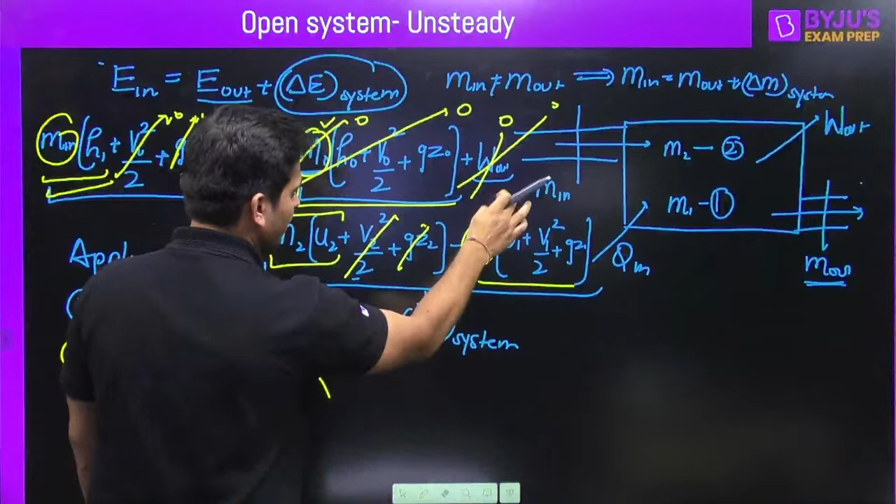Exit is still not there, so this will still not be there. Again, this is not there, but this time this is not 0. This time it is not 0. Okay, so you have this, you have this, you have this, you have this, and you have this. Okay, so we will write this very quickly. Sachin, what happened? What did you do wrong?

Okay, what do we have? M in, H in plus Q in is equals to M2 U2 minus M1 U1. M2 I know, M1 I know.

What is M in? Can you tell me what is M in? Can you tell me how can I calculate M in? Can you tell me very quickly how can I calculate M in? M2 minus M1. Very right. Very nice.

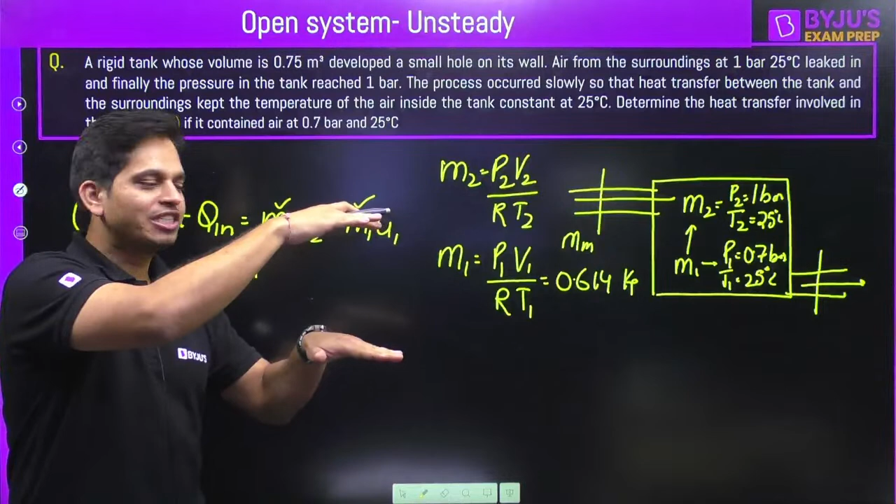Because already M1 was there. Okay, now the final mass is M2. So how much came? The difference between M1 and M2. Okay, Min is equals to M2 minus M1, which you have calculated to be 0.263. I think that is absolutely correct. 0.263, yes.

Now there is nothing left. There is nothing left in this question, right? Can you very quickly tell me what is Q in? Sachin, can you please solve it and tell me how much is Q in this case? Pavan, are you there? Where did all the people go? Pavan was there, who else was there? How much is Q in this case?

What? No, sir, I mean, I didn't understand. What did I ask? I forgot. Okay, are you not solving it? I don't think that is correct. Can you try that again one more time? Minus 134, I don't think that is correct.

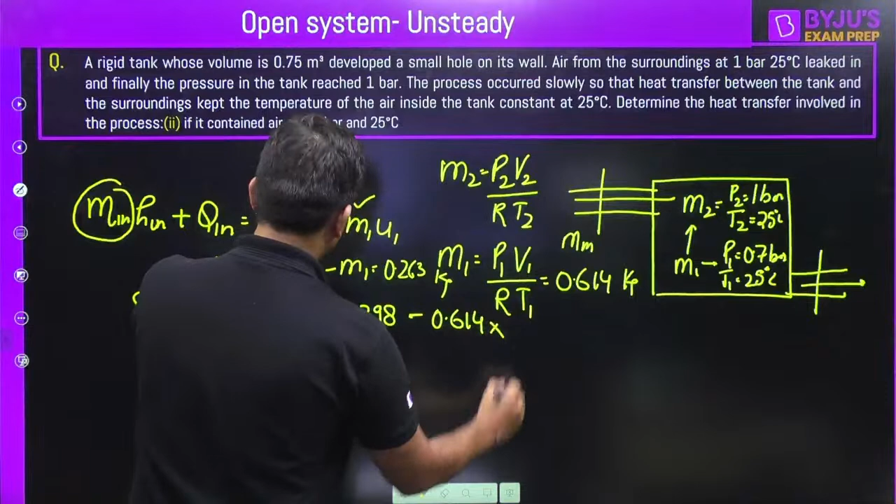Okay, M2 is how much? 0.877, okay. 0.877, and U2 is CV, 0.718. T2 is 25, means 298 Kelvin. Okay. Plus, I'm sorry, minus M1 is 0.614, 0.718 into 298. Temperature is constant.

Now this will go this side, minus 0.263 Cp H. In this we have Cp, right? You are, I think, some problem with units, I guess. Answer seems okay, or maybe I have done a mistake. I don't know, please calculate it. I just have answers, okay.

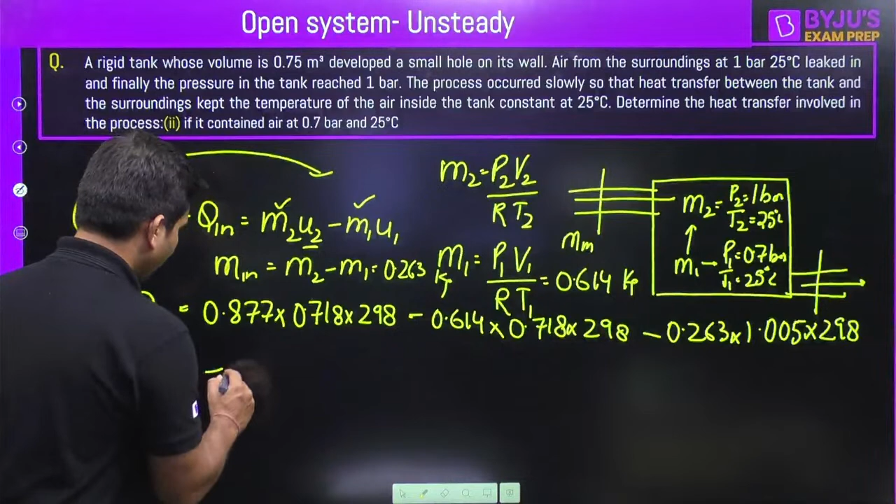0.263 into 1.005 into 298. I think it's 20. Yes, that is correct. Minus 22.504. I was confused if I did a mistake. Okay. What was the mistake earlier? How did you get minus 225? Okay, so minus 22.5 kilojoule.

Okay, so Sachin, are you there? Have you solved it? It's okay, you can take your time. If there is an issue, you can tell me tomorrow. Okay, no issues, Bhavya, it's fine.

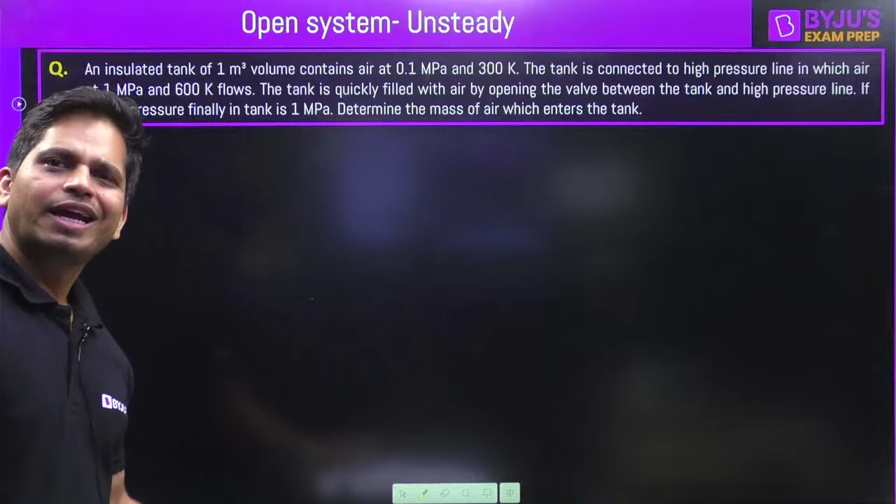Okay, so I have one more question I was thinking of solving today, but you take this question. These are good questions, okay? You take this question, try to solve this. If there is an issue, we can discuss this tomorrow. It could be little complicated, little bit difficult, but if you apply the concept that I have told you here, you write the whole equation, you see what is there, what is not, and you try to solve it. Okay, just take this question, because we are already after 7.